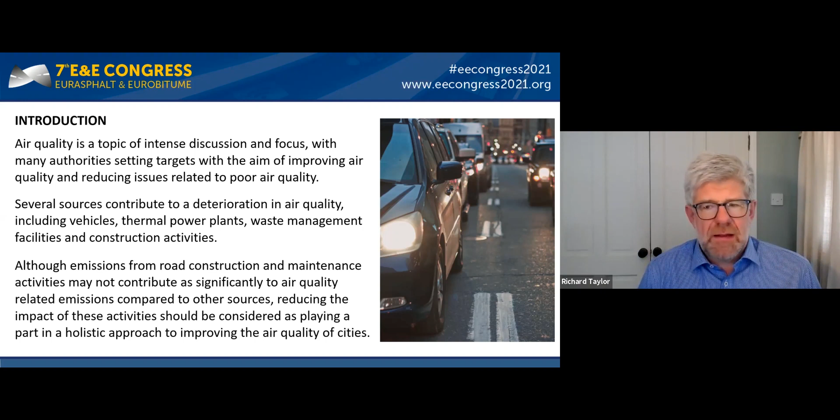I'm going to describe today an additive technology known as Bitumen FreshAir that we developed at Shell over the last 2 or 3 years. The technology is basically added to the bitumen, and it reduces the air quality related emissions from bitumen during storage, paving and asphalt manufacture. If we look at where the sources of emissions related to air quality could be, we may get some emissions at the bitumen refinery or at the PMB plant. Similarly, at the asphalt plant during the storage stage of the bitumen. We also have emissions during the mixing and loading of the material into the truck, and then finally, we will have emissions potential at the asphalt laying sites.

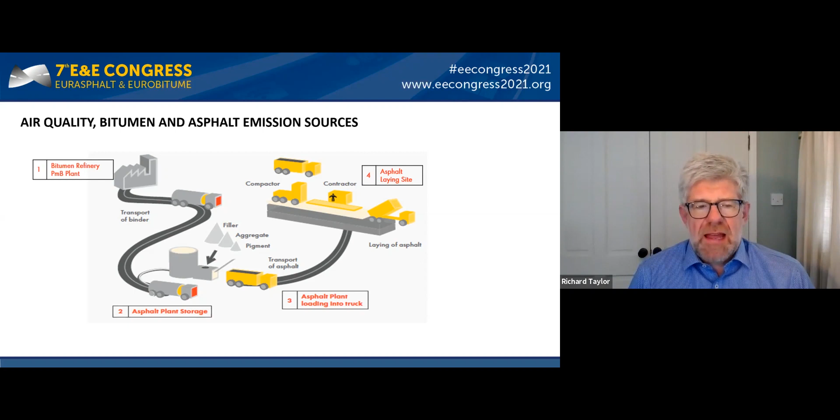Generally speaking, the emissions are more prevalent during the asphalt stage because you have more air within the open structure of the mixture. So if you imagine the mixture in transport, there's more air within that loose mixture for the emissions to develop. Then when you come to the paver, the material is leaving the truck and it's being agitated through the paver, and at the augers there are emissions released. Finally, under compaction, the roller is squashing out the air from the mixture. So generally speaking, we tend to see emissions more easily at the asphalt paving end.

So we started our study at our research laboratory in Bangalore with a set of 20 bitumens from all over the world, from different geographical regions. We took a very wide range of penetration, from 10/20 penetration at one end right through to 160/220. Plus we included 14 additional polymer modified bitumen samples. These were both laboratory prepared and plant prepared, and also cross-linked and non-cross-linked. So what we have here is a very wide range of different bitumen types, different viscosities, different bitumen chemistries, of course from different refineries.

And we designed our lab experiments to simulate the end-to-end story. So we had some tests focused on the headspace in bitumen storage, some during the transportation of bitumen stage, the asphalt mixing stage. We had asphalt mixers instrumented to measure the emissions during mixing, similar with a roller compactor, and then also with slabs of material during their early pavement life.

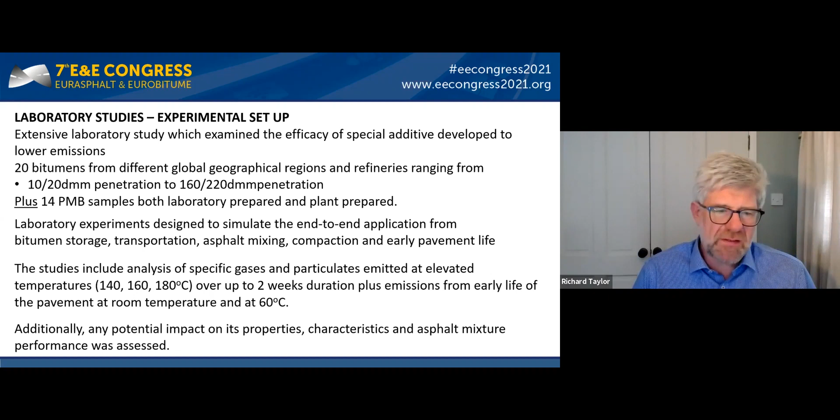So we looked at the range of temperatures for the hot part of the cycle - 140, 160, 180 - for the storage, transportation, mixing, compaction. Then we looked at 60 degrees, which we thought was representative of a pavement on a hot summer's day, for the emissions from the finished pavement. And then, of course, we looked at whether this had any impact on the specification properties and characteristics of the bitumen and the asphalt.

I'm not going to dwell on the experimental setup here - this is all detailed in the paper - but you can see the specific gases and particulates that we were looking at, and you'll spot that maybe not all of them are specifically air quality related. We also looked at H2S as a kind of nuisance gas that we wanted to detect during the exercise. So you can find all the details in the proceedings.

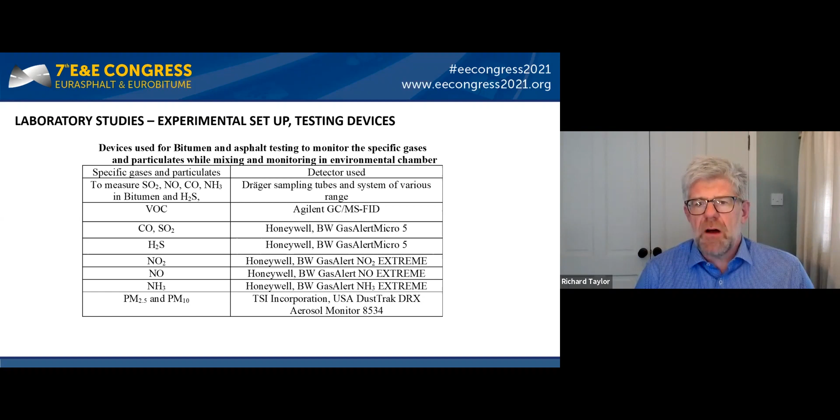So what did we find? If I look at a subset here from the thousands of tests we had - the 20 penetration grade bitumens across the range of temperatures, and the same with the PMBs - we found pretty large reductions in the gaseous species. If we look at the penetration grade reductions for SO2 and NO, we're seeing more than 50% for NO and SO2 at 90, and then in the PMBs we're seeing similar reductions, a mean reduction of 40% SO2.

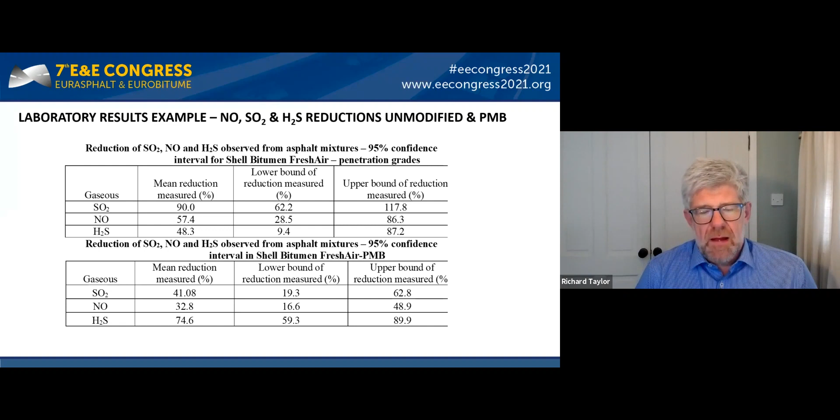H2S, rather unsurprisingly, in a PMB there's simply a little bit more of it there, but it does show that the additive itself is also picking up some of the H2S from the PMB, certainly more than in the pen grade.

Having satisfied ourselves in the lab with a relatively large study, we took this out to the field. Now in the field it's a little bit more tricky, as I'll explain later. We have more co-exposure risk - vehicle movements, wind speed to contend with, other sources of dust. In one of the trials we were close to an airport, so we had other issues there with things that were simply floating in the air.

But nevertheless, we've now done several fully instrumented field trials - I'm going to share the data in a later slide. We followed recognized methodology, and we called in an external agency, an external consultant, who were able to provide us not just with the expertise for the experimental setup in the field, but also the equipment which was certified and calibrated, which we used in all of the trials around the world.

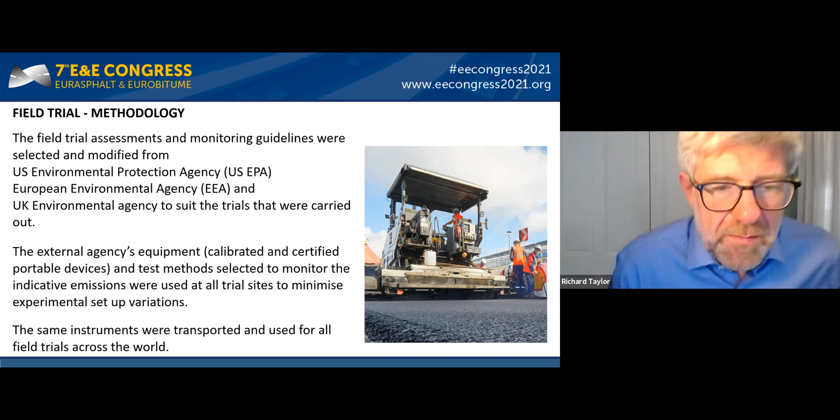So when we were trying to validate the findings from the laboratory in the field, we thought it was very important to take out as many variables as we could. One of the key variables was simply the equipment and instrumentation we were using to make the measurements. And so from the field, a very encouraging set of data from the real life emissions - as you can see, we had similarly fairly high levels of reduction from certain species.

So if we take a look at the NO and NO2, mainly in that sort of 50 to 75% reduction there.

We had some very high reductions in SO2 in some sites. You'll also see there are one or two areas where we had some co-exposure, or we believe we had co-exposure. We had some below detectable limits. We had some anomalous data I referred to there from the field trial, which was close to an airport.

But in general, if we look at this data as a data set, it's pretty clear that the additive is having a positive impact on the gas and particulate emissions coming from the bitumen during the production of asphalt paving and the bitumen storage.

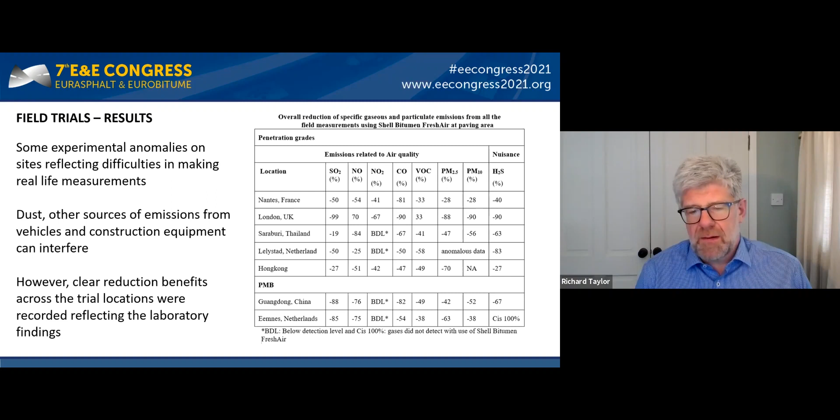And so if we look at the conclusion from the field trials, yes, there were issues with the measurements at times, which is to be expected. But in general, we feel that the outcome of the field trials was pretty well correlated with what we saw in the laboratory.

We would also observe during the field trials that the emissions very quickly disperse into the atmosphere. So if we tried to make measurements, we try to make them very, very quickly when the material is fresh, when it's just being delivered to the paver. If you hang around and try to make measurements later, maybe from a stationary device, you're not going to pick up a lot of emissions.

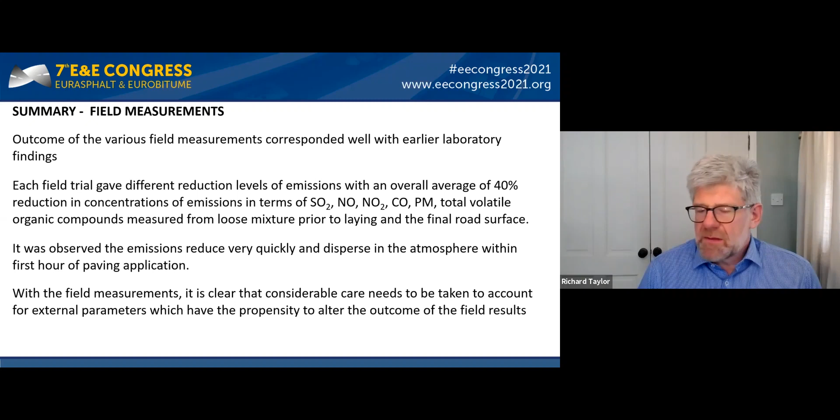And of course, I've said it already, but you really have to take considerable care with the external parameters, upwind measurements, downwind measurements, etc.

So in conclusion, both the laboratory experiments and the field measurements show that the Shell Bitumen FreshAir additive results in significant reductions in air quality related gases, as well as other nuisance vapors such as H2S and odor causing compounds. We have similar efficacy levels across a wide range of bitumen grades.

We don't change the specification here. This is an additive which doesn't change the properties of the bitumen or the asphalt. And since we've developed the additive, we've now gone on to commercialize the technology and launched in more than 10 countries. So I thank you for your attention. I look forward to any questions you might have.

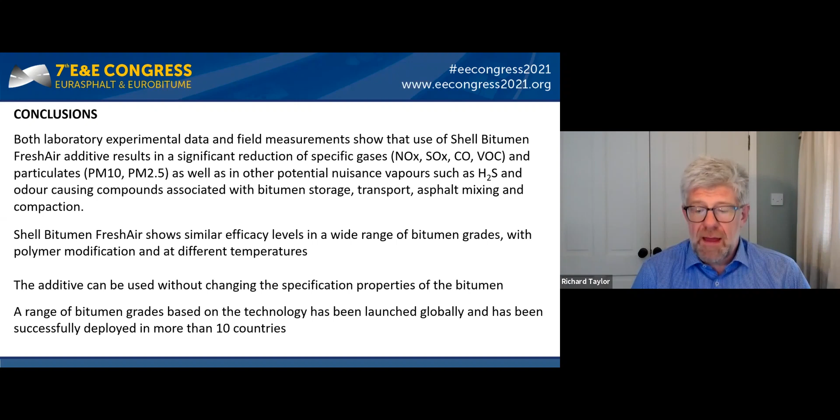Moving on to the next topic. I know when this paper was written, it was quite new for many of us, and it might be still new for you. As you know, EPD is an acronym for Environmental Product Declaration. Larissa Strömberg will present the paper about the experience with Environmental Product Declarations, EPDs, and the digital solutions for the automation of EPDs in Sweden and Norway.

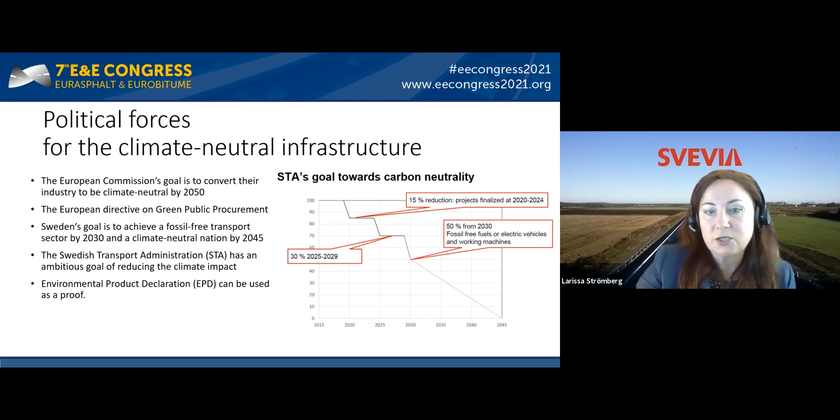The goal is divided into different stages. The first stage was until 2020, when the climate impact had to be decreased by 15% compared with the level of 2015, which is the reference year. Thereafter, the milestones are 30% reduction by 2025, 50% reduction by 2030, 70% reduction by 2040, and by 2045, construction of the engineering works should be climate neutral.

An industry joint project was conducted in collaboration between several road contractors in Sweden, such as PEAB, NCC, and Skanska, the bitumen refinery company Nynas, and the Swedish Transport Administration. The problem statement was: existing standards for developing an EPD leave some freedom, and the comparison between different EPDs, as well as between different asphalt manufacturers, becomes unreliable if different actors use different conditions for the calculations required.

The number of product-specific EPDs for asphalt concrete is still limited, both in Sweden and Norway. The development of a product-specific EPD is a comprehensive, time-consuming and costly task where external expertise is needed. Digitalization of EPD development is seen as a way forward. Our goal was to achieve a common definition of how to measure and report with EPDs, to evaluate the experience from Norway for a digital solution for development of EPDs, and to map actions needed for digitalization in Sweden. We used different methods such as workshops, interviews, and literature review.

As you can see on the left, the development of an EPD is based on a set of standards and regulations, from basic standards on environmental management systems, ISO 14001, and the standard series for life cycle analysis, ISO 14040 to 44, to more specific EPD standards, ISO 14025 and European standard EN 15804, and product-specific calculation rules, PCR. A PCR is produced by an expert group and must be approved by an EPD operator. In addition, the general program instruction, GPI, must be followed when an EPD is being developed. ISO 14025 regulates the program operator, the organization that ensures the verification and publication of EPDs in accordance with the PCR that applies to the product in question.

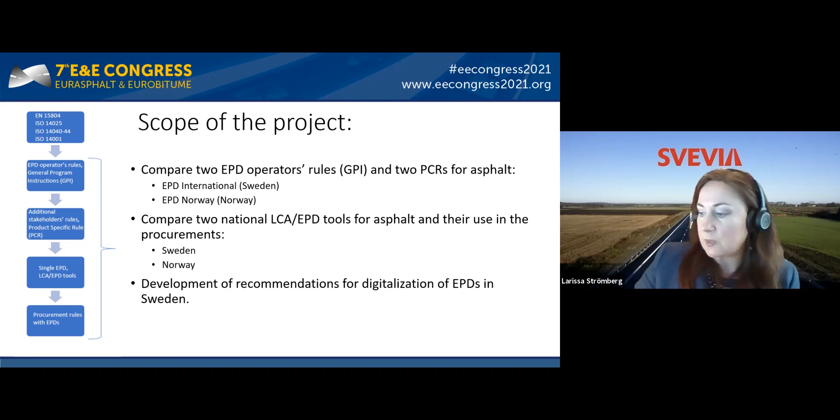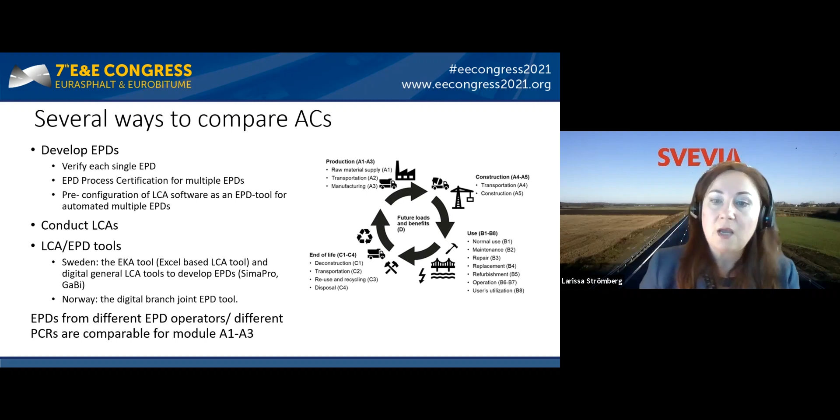This project has identified several ways to compare the environmental performance. Developing EPDs can be done in several ways: verify each single EPD, EPD process certification for multiple EPDs, or pre-configuration of LCA software as an EPD tool for automated multiple EPDs. It can be done by conducting LCAs or using a general LCA EPD tool. In Sweden, we use the EKA tool, and in Norway, they use the digital EPD generator. According to project interviews with EPD operators in Sweden and Norway, EPDs from different EPD operators, according to different PCRs, are comparable only for modules A1 to A3, which is the minimum requirement. The other life cycle stages are not assessed and thus cannot be compared at the moment.

The project suggests several ways forward to use the EPDs. It is easy to adapt the Norwegian EPD tool to Swedish conditions for A1 to A3, but it must be harmonized with both PCRs for asphalt concrete and verified by both EPD operators. Variation in the Swedish client procurement requirements with EPDs is a problem and shall be diminished. In Norway, harmonization of procurements with EPDs has been done. The climate problem is global, but the ongoing effort to develop and implement policies for using EPDs is local and at the project-specific level. The European pavement industry has no harmonized requirements regarding calculation, and this should be done at a higher level than Sweden or Norway, on the European level.

The project recommendations are the following. EPD standards are in place but are not fully used by Swedish clients. The significance of the current procurement requirement for the EPD according to EN 15804 can be very broad. In the examples of project requirements that this study has evaluated, the system boundaries of EPDs for asphalt are not clearly formulated. This study has identified a need to create a common terminology for working with EPDs in the Swedish asphalt industry, in the Swedish Transport Administration's procurement requirements, and the EKA tool. The EPD system is designed to estimate the environmental impact of a product. The system is not yet adapted to be used at road project level. The EPD for the asphalt product can be securely calculated by the asphalt manufacturer.

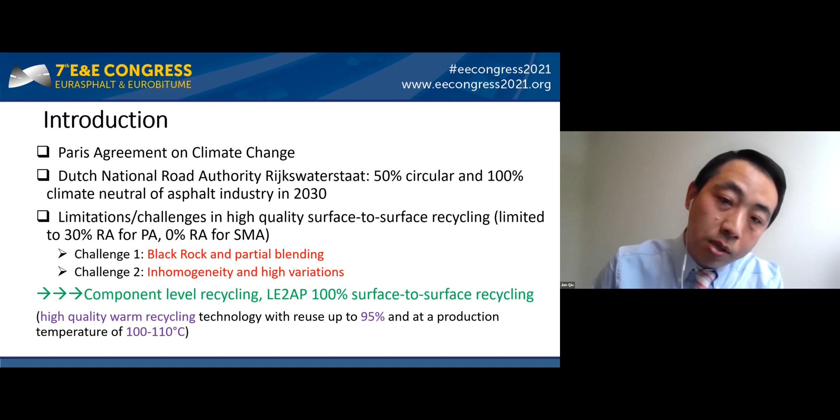To tackle these two problems, we came up with our new solution. We call it component level recycling, that is LE2AP recycling. The idea of LE2AP came from 2013 to 2016 under the European LIFE+ project. What is component level recycling? You may think of the asphalt pavement as aggregate surrounded with a mortar as glue, a mortar composed of sand, fillers and bitumen together. With a decomposition technique, you are able to separate those two, so you get your stones back and also your sand back.

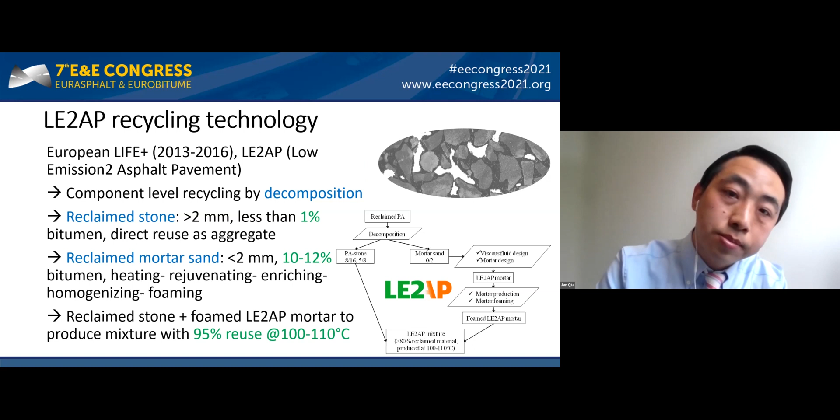The aggregate you get has a very limited bitumen content, so you can use it directly as aggregate. The mortar sand contains about 10 to 12% of bitumen. You can treat it and get a new mortar sand. Afterwards, you are able to foam the mortar and make a high percentage mix at low temperature. A little bit about the decomposition process: it is like a very big centrifuge machine. It runs 50 to 150 tons per hour. What you do is throw the RAP onto the high-speed wall. With the speed, it breaks apart, and afterwards you can sieve it into different fractions. At this moment, we have already applied 200,000 tons in different mixtures, with good experience.

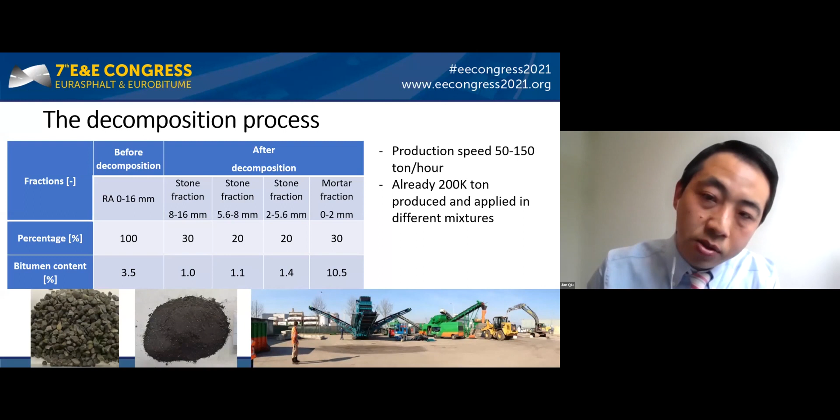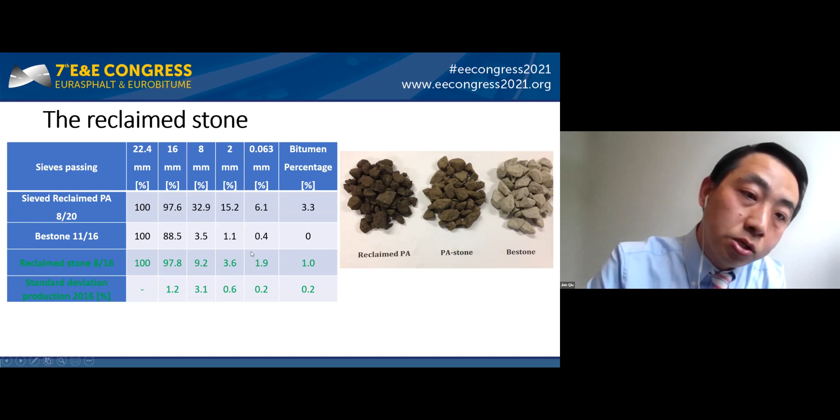The aggregate we have been using, both in gradation and quality, is very much comparable to virgin stones, with a very limited standard deviation. And compared with normal RAP or sieved RAP, it contains less sand, less bitumen and less filler. So the variation is very limited, which allows you to use it at high percentages.

The mortar you get, the orange one, has almost similar gradations of sand and fillers compared with the virgin mortar, but it has a low bitumen content and a lower penetration. So we have developed a blending rule to enrich and rejuvenate it by adding softer bitumen and rejuvenator. Afterwards, the mortar can be tested at laboratory scale with the DSR. So we are able to make a high quality mortar compared with the virgin.

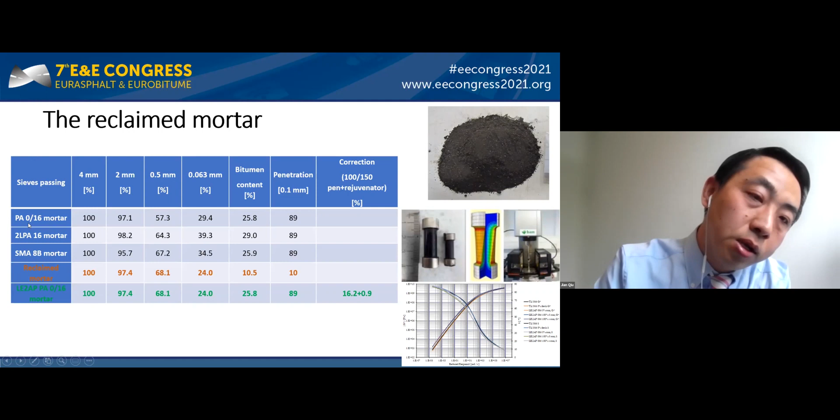The mortar production, that is the second scale. When you want to make it high quality and also in a high amount, in the laboratory you need what we say is a production unit. This is the kettle with the mixing device. That is where you can produce your mortar, and above that you will see a dosing unit. This is a new format of that. With the dosing unit, you are able to foam it at low temperature.

In this case, the mortar that you foamed is at a temperature of about 110 to 120 degrees. And here you will see the expansion ratio of this foamed mortar. It's on average about 10, with a half-life of 3 to 4 minutes. It is very long, and it is very good quality without settlement.

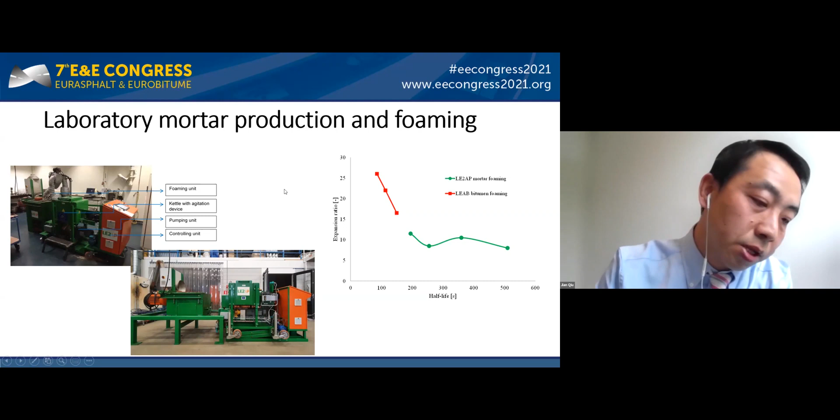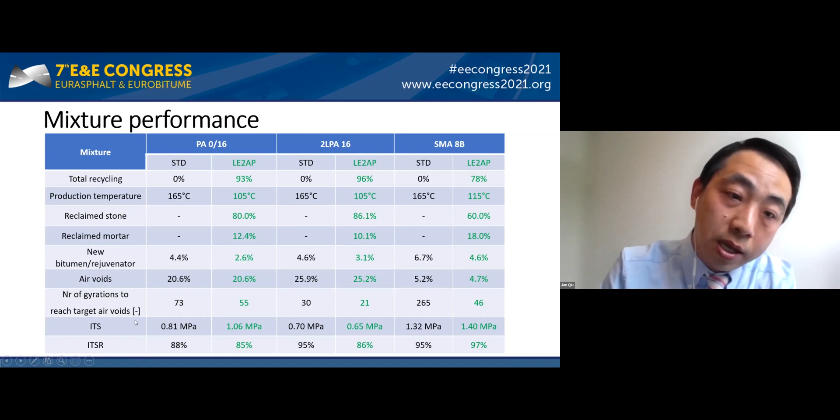When you have the mortar produced, then you can produce the mixture, and you will see that with the 3 types of mixtures with the LE2AP category, there is a very high percentage of recycling and low production temperature. In the end, you will see that their strength and water sensitivity values have very good results. Yeah. Now we go a step further.

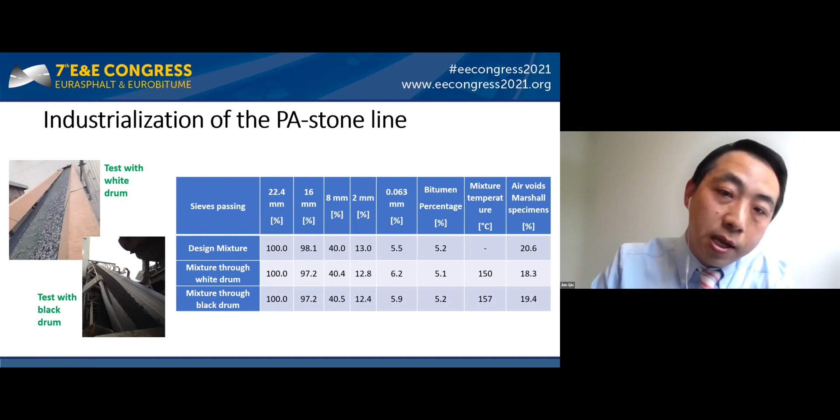We go for industrialization. The handling of the recycled aggregates is not that difficult. You can do it with the white drum, or you can do it with the black drum. We have been conducting research on that. It does not make much difference afterwards. Yeah, the mortar line is a different story.

There is no standard mortar dosing or mortar production unit. The only thing is you can borrow it from mastic asphalt. We did it first with the mastic asphalt concept. We use the stirring kettle from the mastic asphalt, and we dose the mortar in, and also the softer bitumen. And afterwards we use a dumper to lift it to the side of the plant, and by making a dosing pipe out of it, we're now able to dose the mortar into the mixer.

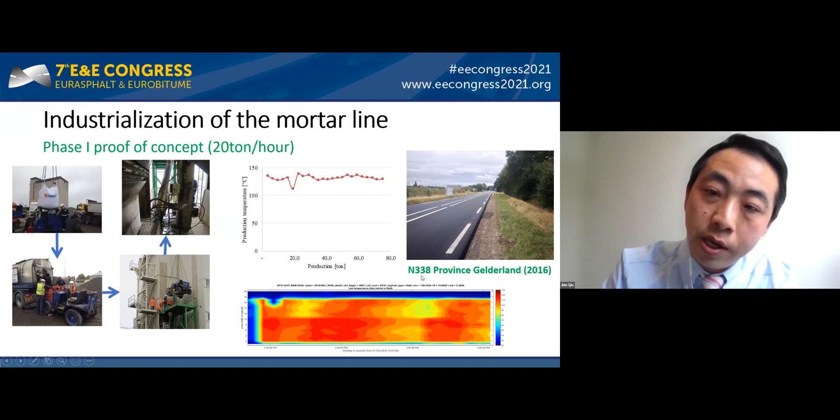Of course, this is very labor intensive, so we could only achieve, for the proof of concept, 20 tons per hour. We were able to make a stretch in the province of Gelderland on the N338 in 2016. The second step is to make it optimized.

In 2018, the province of Gelderland and also the province of Brabant came to us to say maybe it's time to go further and apply it for SMAs. SMA has a specific challenge. It has 2 times more mortar than porous asphalt, and also a longer stretch. So we said we don't use the dumper anymore. We are using a big kettle.

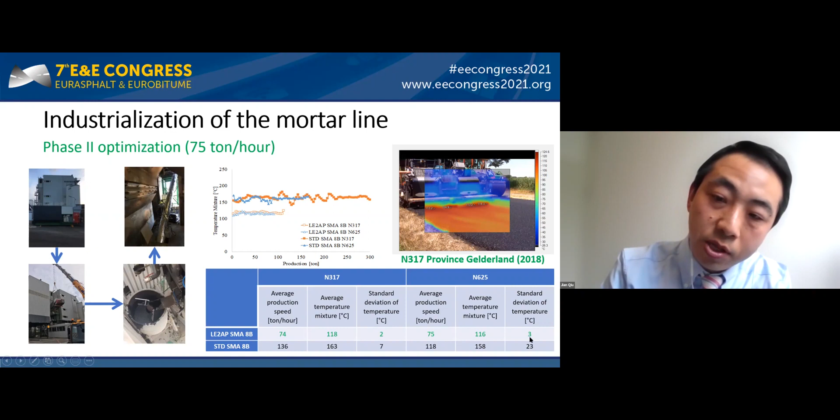This kettle allows you to have 50 tons of mortar inside, and now we lift the whole kettle, and we also built a dosing unit into it to be able to have correct dosing. Afterwards, we are able to produce. What's interesting to see in the results is that the standard deviation of this type of mixture is very limited compared with the standard one.

The further step that we are now working on is to go for full industrialization. We want normal production to be adapted to 100 to 150 tons per hour continuous production. Translated to the mortar part, that is about 20 to 30 tons per hour continuous production. And we are now working on this.

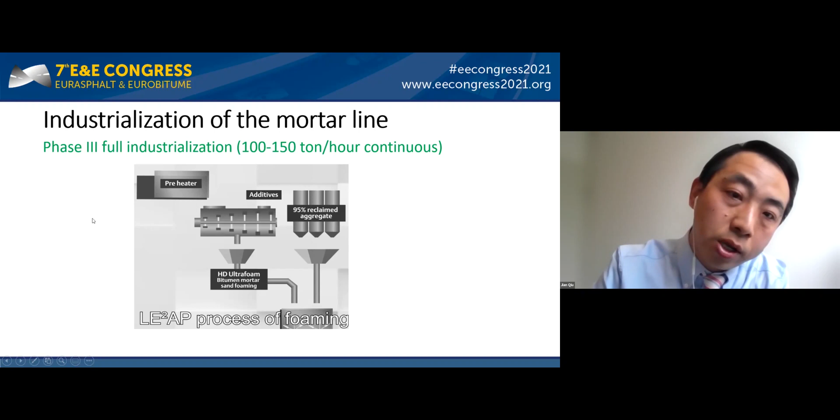So to conclude, it is possible to make high quality surfaces with a very high percentage of recycling, reaching 96%, with a low production temperature of about 105 to 115 degrees, and it will benefit your environmental cost by 50%. We are busy developing the mortar line, and the mortar line can be used and is already being used for different types of mixtures, and is performing well. And now we are looking for a way to make it a continuous production.

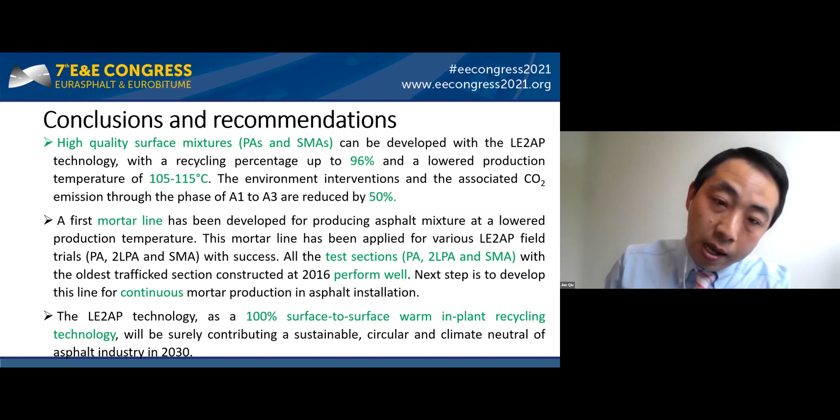In the end, we say that LE2AP is a method that has good potential for 100% surface to surface warm recycling, contributing to a sustainable, circular, and climate neutral asphalt industry.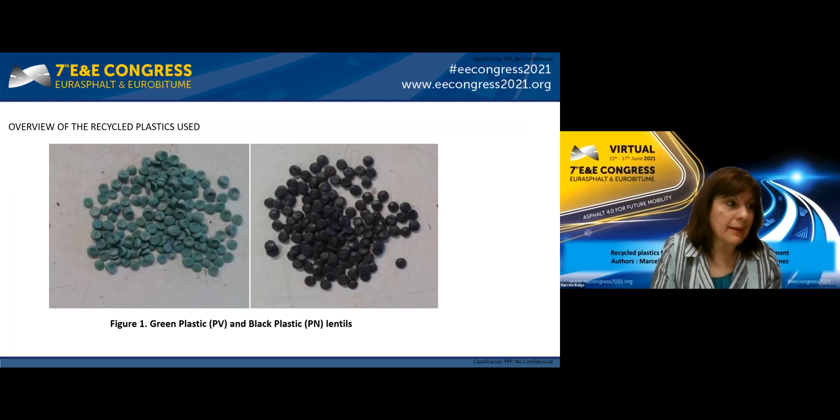In a previous lab study conducted before the field test, a softer CA20 bitumen was used to incorporate the recycled plastic both in pellets and in powder, in 4 increasing amounts from 1 to 4%. The samples were compared with 2 other bitumen control samples, which were a conventional CA30 bitumen and a commercially available polymer modified bitumen named AM3. This bitumen met the respective Argentinian specification. The physical and rheological characteristics of these 3 bitumens are shown in this slide.

The previous test showed a level of 4% of PE when added to the CA30 bitumen did not always result in homogeneous distribution of the PE material. It was also found that adequate mixing temperature, speed, and time are key variables in the mixing step to get a homogeneous final product. It was concluded then that the CA20 bitumen was the best option to incorporate the recycled plastic in order to get a compatible plastic bitumen mix.

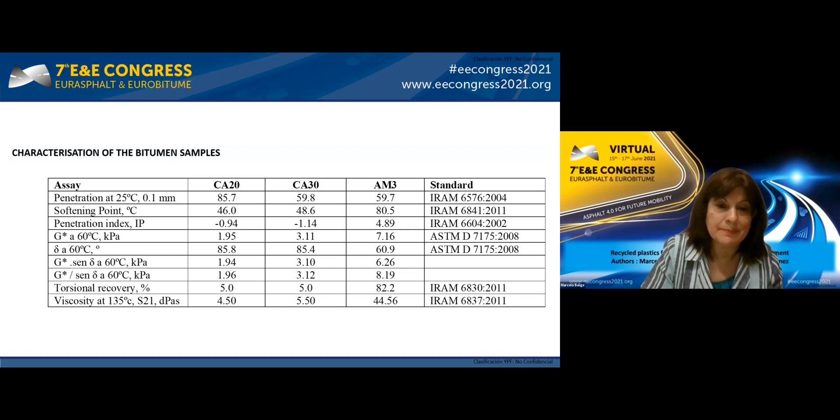Going to the field work, between late 2018 and January 2019, 5 different types of experimental pavement sections were constructed on provincial route number 18 of the Argentine province of Santa Fe, from kilometer 11 to kilometer 11.5. The scheme of the lanes going to and coming out of Rosario City is shown at the bottom right portion of this slide.

There, you might see that 4 of the 5 pavement sections shown in the upper part of this scheme, of 100 meters each, were built using modified bitumen with either recycled green plastic coded PV or black plastic coded PN. The process used to incorporate the mentioned recycled plastic is identified in the graph either as VS when the dry process was used or VH when the wet process was used.

You will also see that the 5th asphaltic section of the descending lane at the extreme right of this graph used a conventional CA30 bitumen. This section was selected as the reference pavement of this experimental work. Finally, at the bottom part of the graph, you will find the ascending lanes going out of Rosario were built using recycled black plastic incorporated with the wet process, coded as CA20-PNVH.

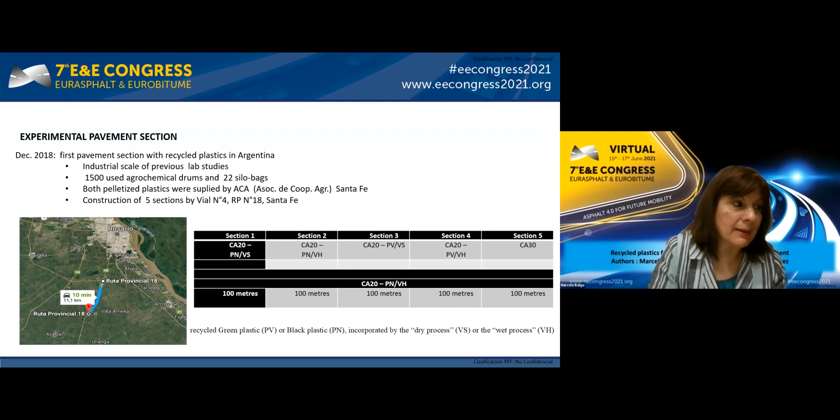In summary, this was the first asphalt pavement construction in Argentina which used recycled plastic from drums and silo bags. The following conclusions were obtained. Firstly, the lab results of the asphalt obtained from the experimental paved sections were in good agreement with the product previously made and analyzed in the lab. However, the voids measured in samples extracted from the experimental sections showed a higher value when compared to the lab mix one.

Secondly, an improved resistance to moisture damage was detected in all asphalt that incorporated recycled plastic, as measured by the tensile strength ratio, when compared to the CA30 asphalt adopted as reference. All paved sections complied with the permanent deformation specified by the Argentinian road authorities.

Fourthly, while cracking problems had been observed a year ago in the US in pavement that included modified bitumen with recycled PE wax, our periodic assessment of our experimental sections, which includes macrotexture analysis by the sand patch method, rut depth assessment, as well as sample extraction, so far has given positive results, especially on the CA20-PNVH asphalt mix used in section 2.

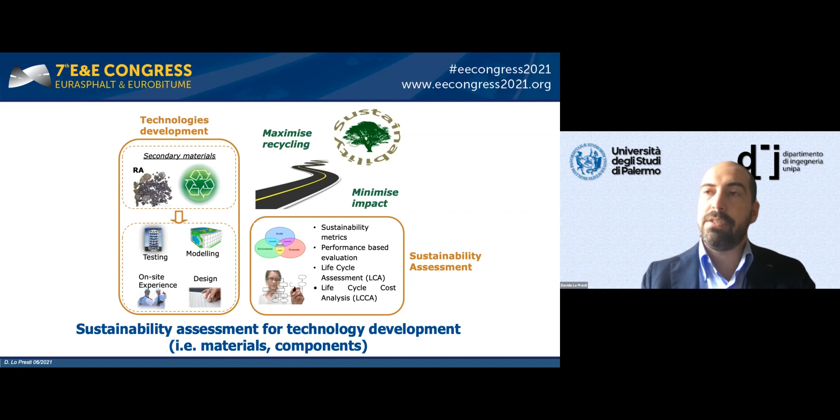But this will also need to happen whenever we manage an asset like the road, and whenever we want to understand whether one maintenance and rehabilitation strategy is more sustainable than another. In other words, we would like to include a sustainability performance-based management of road pavement, which is what we call life cycle management.

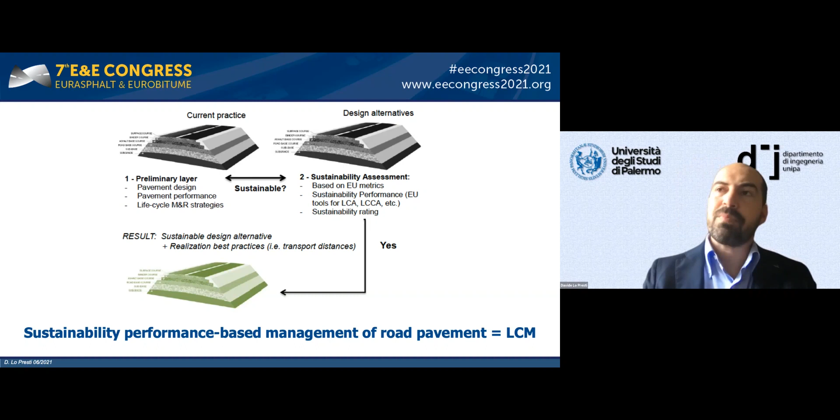Hence, Pavement LCM is a project that has been supported since 2019 by the Conference of European Road Directors to exactly provide this type of knowledge and tools to CEDR.

The goals of the project are, one, introducing guidelines on how to perform lifecycle management with a specific focus on sustainability assessment, but also to create a platform for the interactive transfer of knowledge. So we learn by doing and sharing, and finally to produce a package of frameworks, data sets, and tools to allow road authorities to implement this concept within their organization.

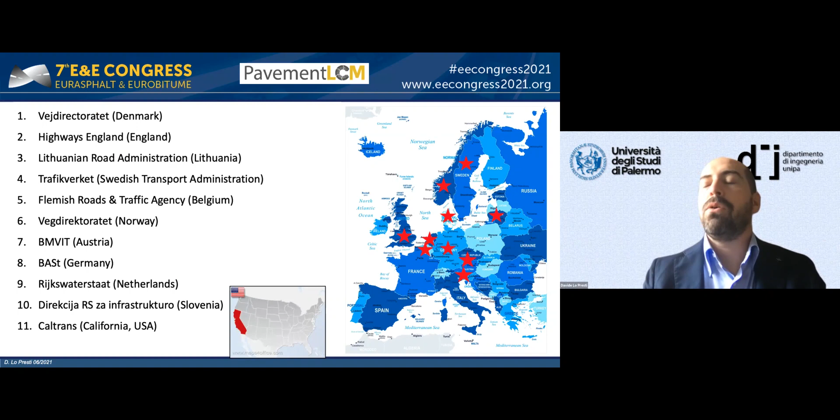So let's see, first of all, what do they know, at least up to 2019, when we had the chance to collect interviews. To understand that, we performed interviews by sharing a questionnaire amongst different road authorities in Europe and also in California.

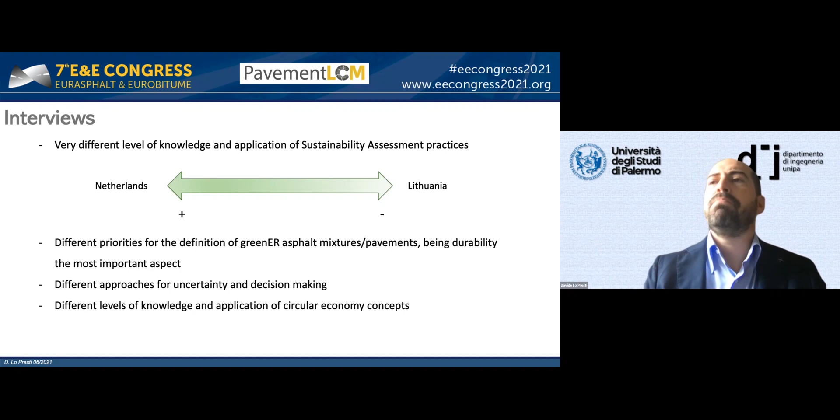And what we found out is that there are clear differences and different levels of application of what we think are important concepts related to sustainability and sustainability assessment—different definitions for a greener asphalt, for instance, or greener pavements. Certainly durability is considered one of the most important aspects, but there are differences in other areas too.

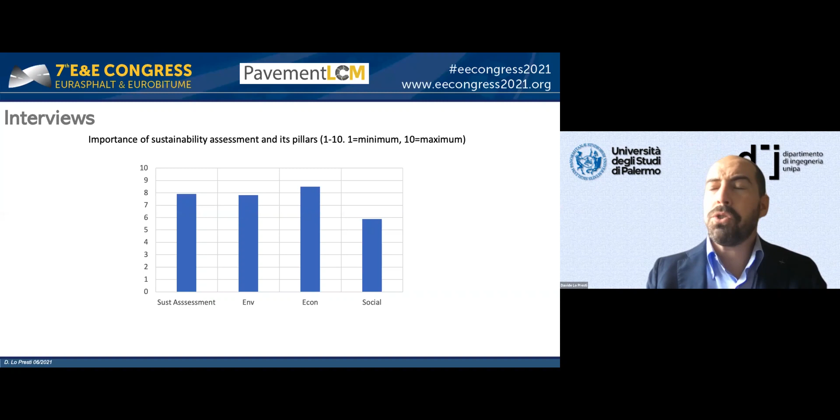In terms of what is intended by sustainability assessment, the majority of people consider environmental and economic as the main pillars. So the social pillar is still blurry for the majority.

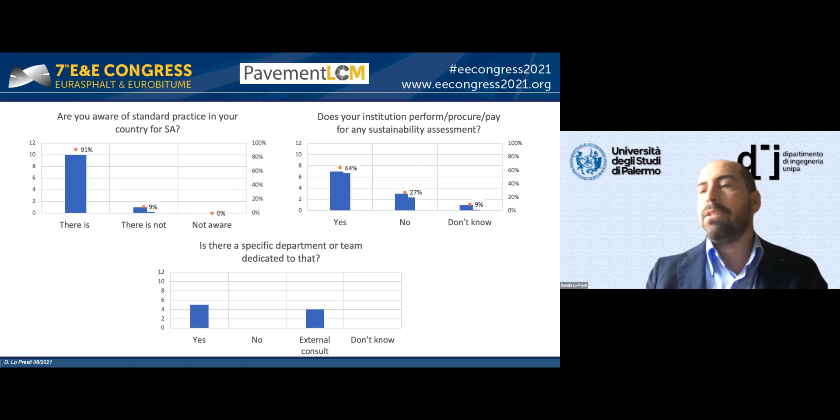Organizations are aware of standard sustainability assessment, and they know that within the organization, someone is performing it or using it to procure projects. There is usually a department dedicated to it or an external consultant who carries out the job. The exercise is made mainly at the planning stage, and there's a balance of reasons for doing it, but mostly it's for decision making.

For road authorities, the exercise is mainly important at the maintenance stage, of course, because they have to manage the asset, and the exercises carried out so far are more focused at the project level.

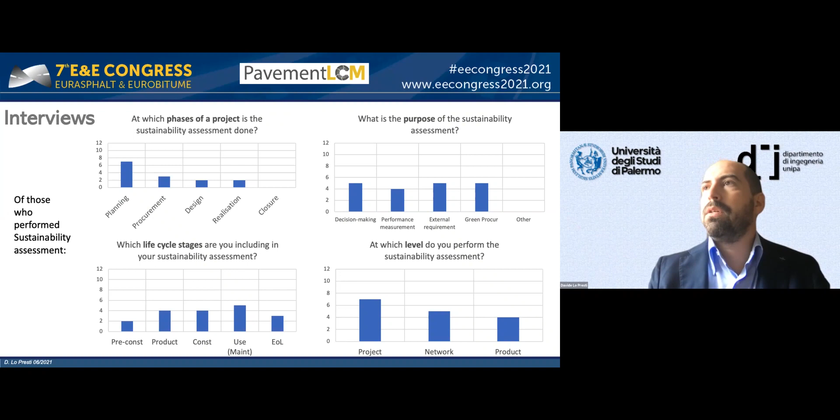So these are some of the results we wanted to share, just to give an idea and to help understand where we should focus to improve what they know.

So for the sake of time, I'm going to move directly on to what national authorities do about it. So what are they doing?

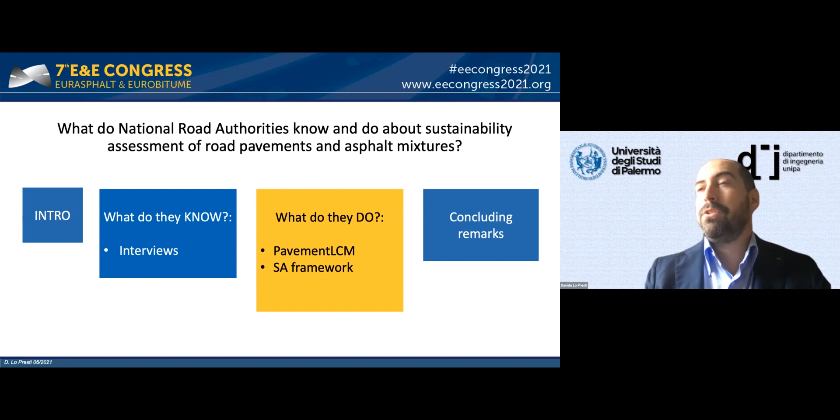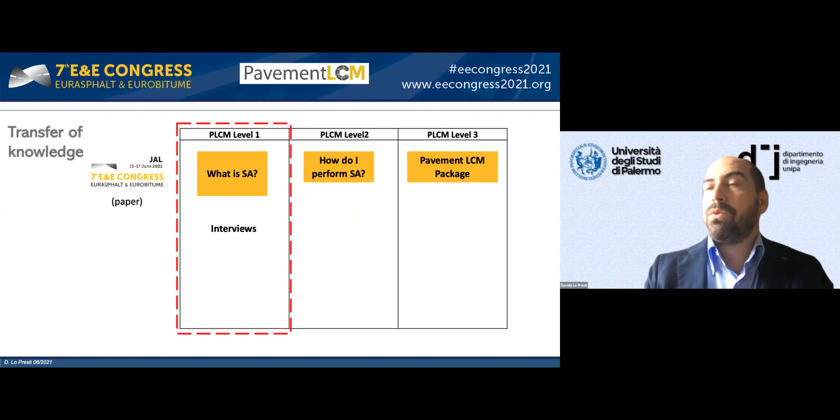First of all, I will say they are supporting Pavement LCM, which is a project supposed to provide them with this type of knowledge. The state of the art was done with the interviews, and the results are in the paper. But we're also organizing webinars—we organized two, one in 2020 and one in 2019.

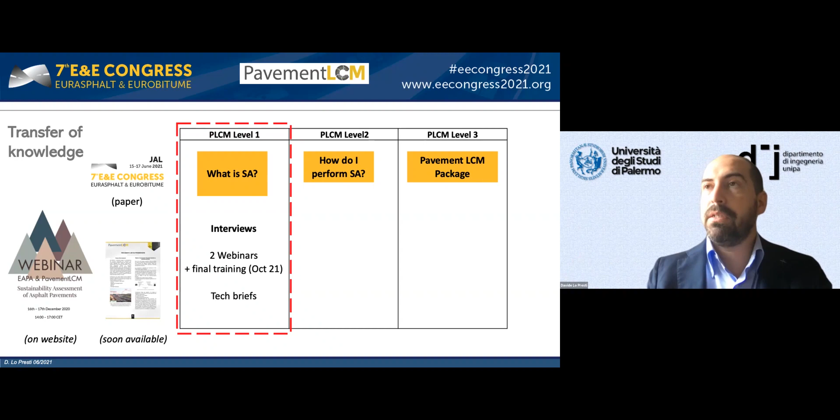And the second one was very successful with the support of EAPA this December. But we're also creating documents like technical briefs that can be distributed among the staffs of National Road Authority. And what else they're doing is that they would like to have a framework to actually understand how to comply with standard procedures. Well, this is exactly what we're doing.

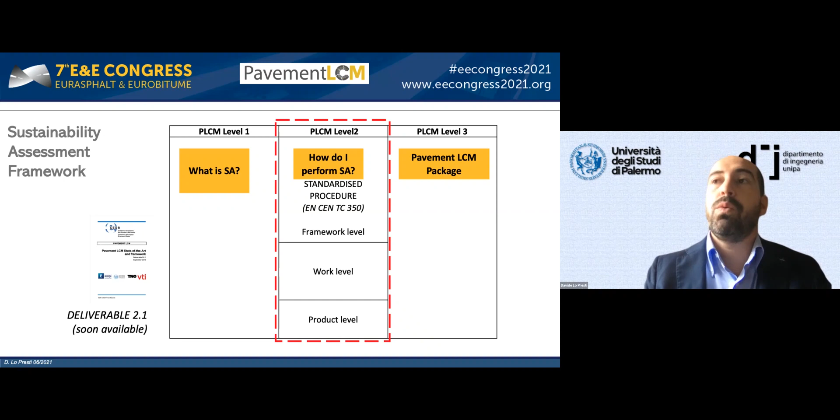And for those who don't know, since 2011, at least at the European level, there is a committee, the CEN Technical Committee 350, which is working on defining a standard for sustainability of construction works for civil engineering works. Within these standards, it is suggested to perform an exercise that considers indicators covering the environmental, social, and economic pillar, but also to identify what is called technical and functionality requirements.

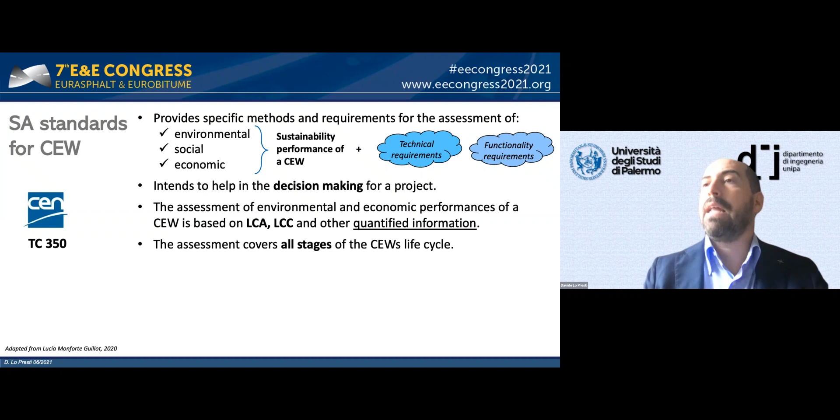The exercise is intended to help for decision-making related to a project, and to do a sustainability assessment with quantitative assessment of the value of the indicator by using life cycle techniques such as LCA and life cycle costing, doing this exercise for all the stages of the work, for products, processes, and services, applicable to new as well as existing civil engineering works, and using environmental product declaration as a communication tool.

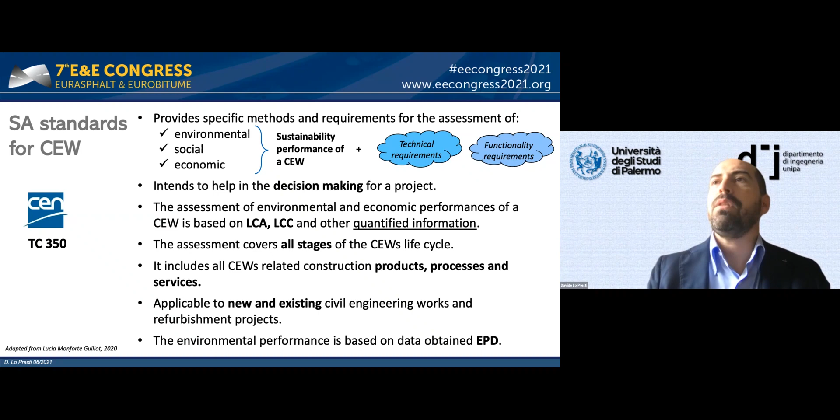So in order to do that, we set up a process which is defined here in the slide. All the stages are covered in the deliverable, but today I really wanted to give you a highlight of two parts which are very important.

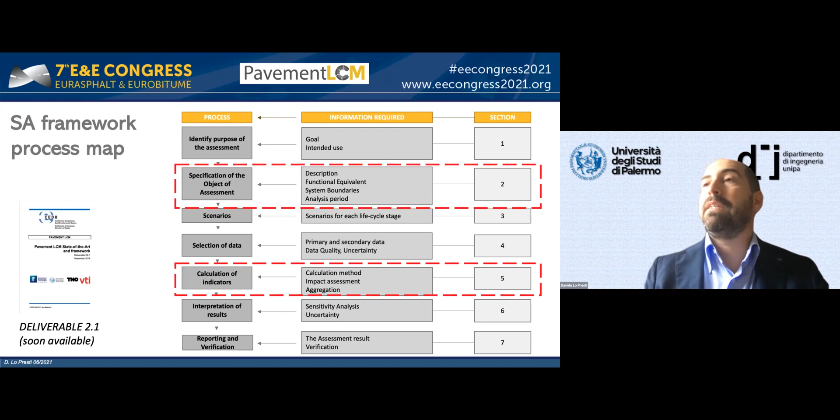First of all, within the object of assessment, it's what we think are the system boundaries of the exercise. We suggested to use the framework now specifically for pavement, and in particular by doing two exercises which are different in nature for us. One is for pavement materials, the other one is for pavement maintenance activities.

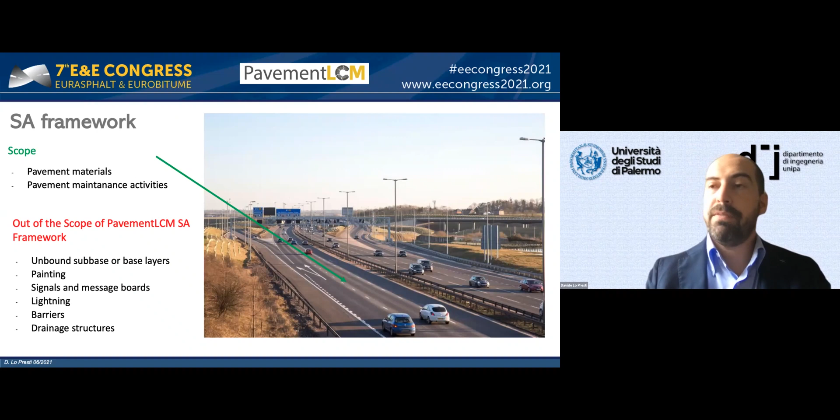Painting, signals, lighting, barriers for the moment can be out of scope, even though the framework is flexible enough to do that. And the two exercises are really, as you see in the slide.

So first of all, we have a cradle to gate exercise where we can include the production of asphalt mixture, for instance. And this is a different exercise because this has experts such as material scientists, material supplier, asphalt manufacturer, contractor, and the indicators are also specific for this phase.

While the other exercise, which can be cradle to laid or cradle to grave, well, this is for evaluating the sustainability of maintenance rehabilitation strategies, for instance. So this is what should be duty of road owners and road managers. So concepts like reference service life are introduced, and functional unit is here per square meter of pavement.

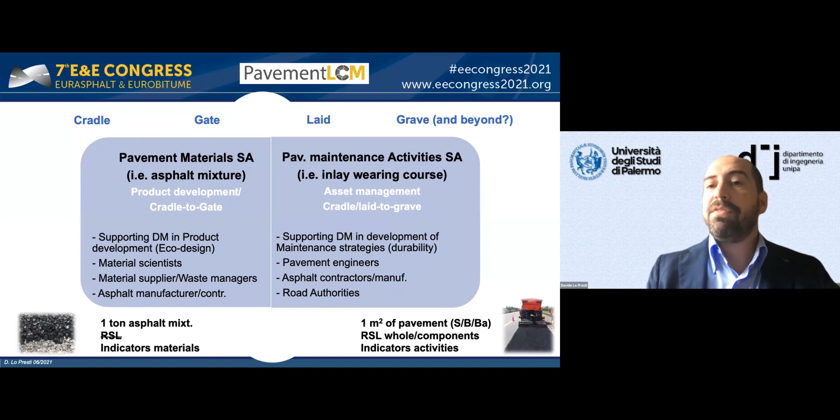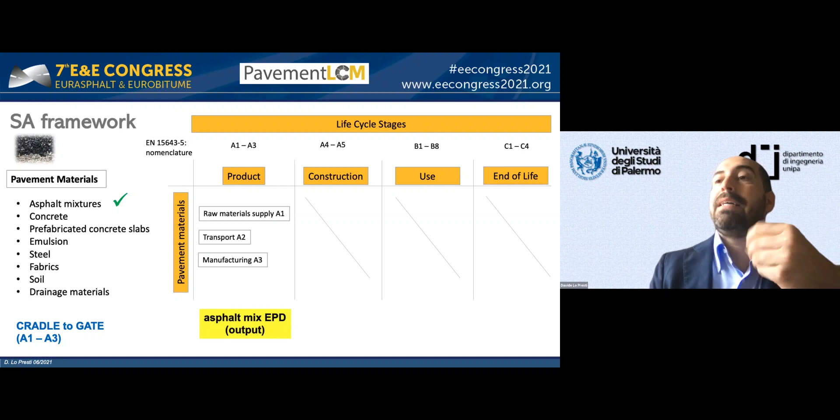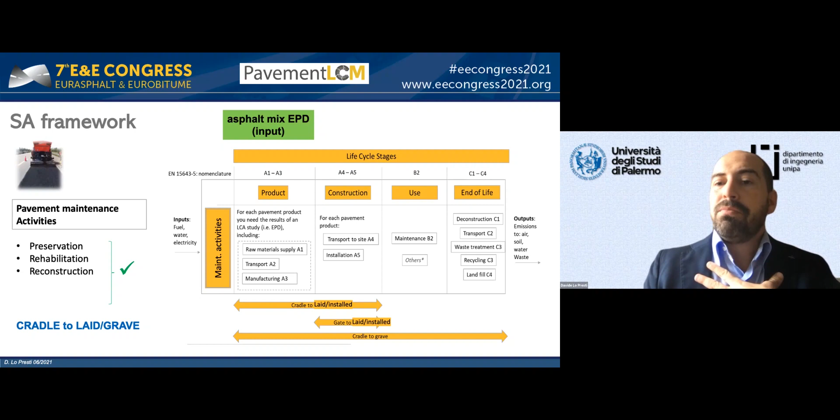So different exercises that are linked by one product, which is the EPDs, that should be developed at the pavement materials or product side as an output, and should be used as an input when we evaluate, for instance, certain maintenance strategies. So this is one of the main messages.

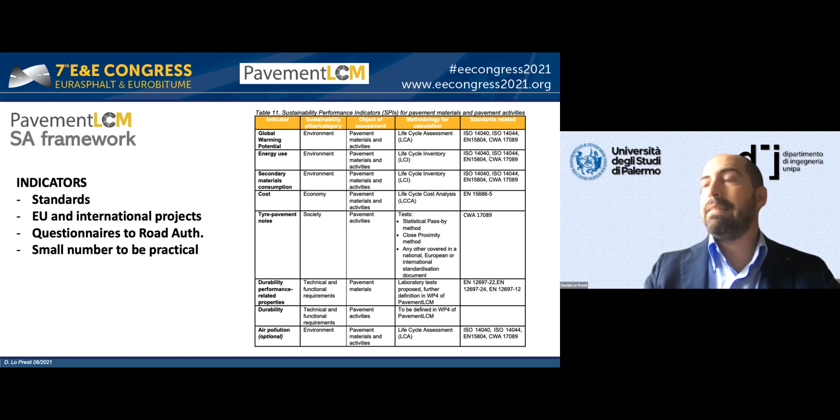And the other one is that we developed a list of indicators that cover the three pillars as well as the technical and functionality requirement. And these are based on a survey we did over standards and different projects, as well as contacting road authorities. These indicators are divided by pavement materials, pavement activities, and can be all quantified mainly with life cycle techniques.

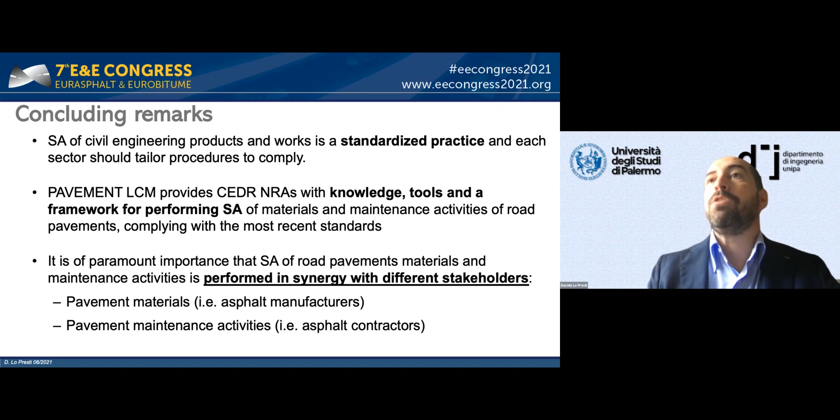So this synergy is very important, and that's why we would like to introduce what we started at the end of 2020, where we did the first workshop on sustainability assessment together with CEDR and EAPA, who organized it together, and we facilitated by providing results of Pavement LCM. We suggested to stay tuned because next there will be another one very soon.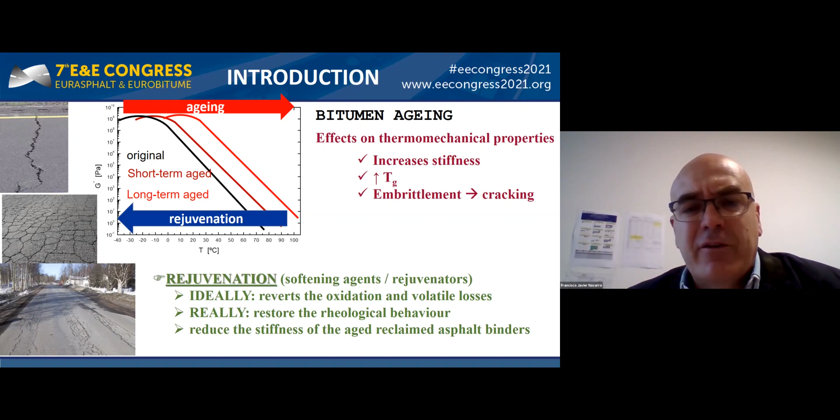In order to alleviate this problem, rejuvenators are usually employed. Even though bitumen rejuvenation ideally should revert the effects of oxidation and volatility losses, in fact what they really do is restore the original rheological properties of the binder, so most of them are softening agents that reduce the stiffness of the aged bitumen.

Here, a new concept of physicochemical rejuvenation is presented that involves the use of amphiphilic surfactants formed by a long aliphatic apolar hydrocarbon tail with a polar reactive head able to chemically interact with polar bitumen compounds. Therefore, it is expected that by attaching reactive molecules to asphaltenes, the surface polarity is reduced and their association into larger structures is inhibited, leading to a disruptive effect.

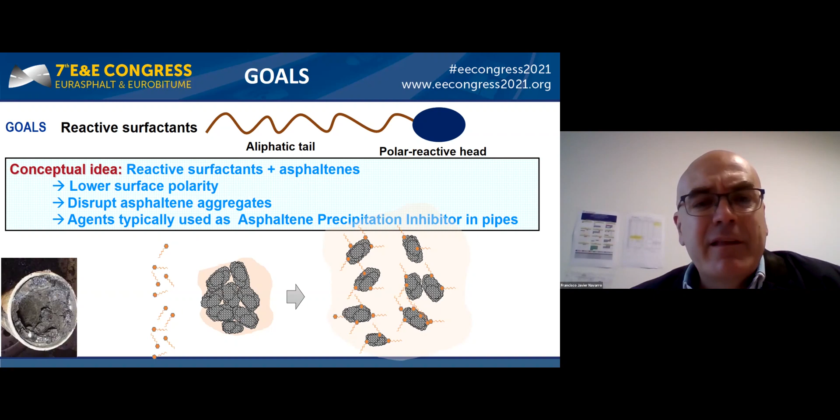Two different sets of surfactants have been used here, both having an aliphatic tail of 12 carbon atoms: dodecenyl succinic anhydride, called DSA, and dodecyl benzene sulfonic acid, DBSA, and its sodium salt, sodium dodecyl benzene sulfonate. In addition, to study the effect of the polar reactive head, succinic anhydride and benzene sulfonic acid have also been used as bitumen modifiers.

Finally, a typical SBS from Dynasol, commonly used to modify bitumen, was used for comparison. A hard 13/22 bitumen was employed as the base material for this study and modified with 3% of each reactive surfactant. After modification, samples were submitted to rheological characterization, infrared spectroscopy, thin layer chromatography, atomic force microscopy, technological tests, etc.

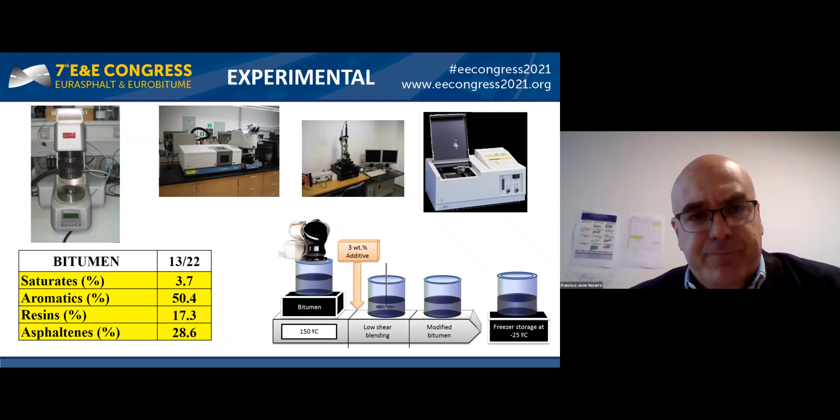The addition of alkyl benzene sulfonic acid, DBSA, leads to a decrease of 3 decimillimeters in penetration and a clear rise of 4 degrees in softening temperature. By contrast, the alkenyl succinic anhydride, DSA, produces an opposite effect, revealed by a subtle penetration increase and a clear drop of 4 degrees in ring and ball softening point. Consequently, DBSA appears to act as a stiffening agent, whereas DSA seems to produce a softening of the binder after modification.

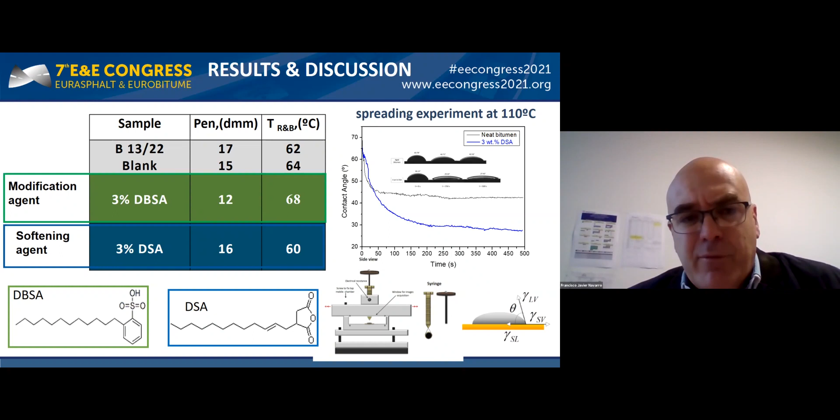The effect of both additives at high in-service temperature may be analyzed by means of flow curves at 60 degrees. Analyzing the unmodified binder, it's clear that the blank sample only undergoes a slight increase in viscosity due to bitumen oxidation during processing. However, DBSA modified bitumen presents a remarkable increase in Newtonian viscosity, reaching values very close to those of SBS modified binder. On the contrary, DSA modified bitumen undergoes a completely different effect, clearly presenting a notable drop in viscosity values.

In order to characterize the thermorheological behavior over a wider temperature range, a temperature sweep in oscillatory shear at 10 radians per second has also been performed on all samples.

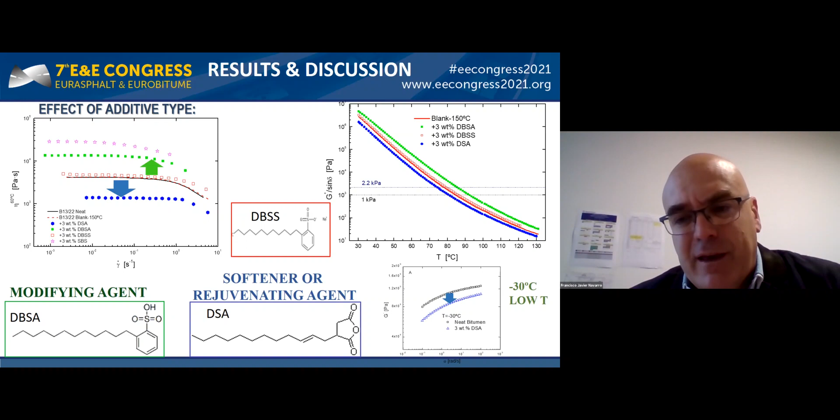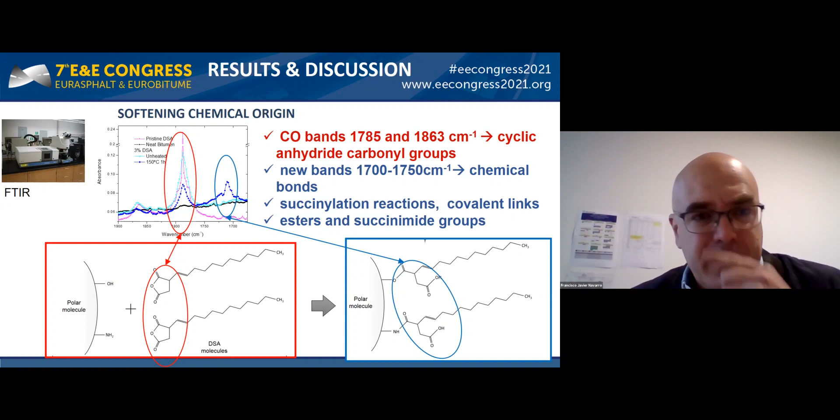In order to analyze the chemical origin of this modification, infrared spectroscopy has been performed on succinic anhydride surfactant samples. As shown in this picture, the typical bands associated to anhydride carbonyl groups are reduced during processing, and additionally, the appearance of new peaks associated to the formation of ester groups are clearly observed. Consequently, as shown in the bottom picture, the DSA molecule results attached to polar bitumen compounds by means of covalent links.

In addition, in the case of the sulfonic acid surfactant, the chemical modification pathway is really different. Thus, it is well known that sulfonic acids are able to protonate the heteroatoms of asphaltenes, leading to the attachment. Consequently, in this case, chemical evidence of what is happening here is the increase in the SARA chemical composition of the asphaltene fraction beyond the 3% of the other surfactant. In addition, when the insoluble fraction in n-heptane is submitted to thermogravimetric analysis, the derivative of weight loss curves clearly shows the appearance of a new peak, which is associated to the development of the ionic pairs between asphaltenes and DBSA.

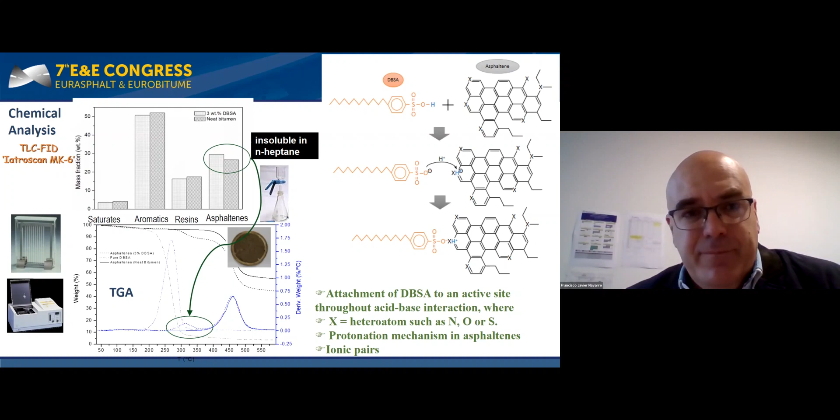However, if we compare the modification caused by the polar head on both additives with those caused by the surfactant, it is clear that the presence of the aliphatic tail leads to a remarkable reduction in the viscosity. Therefore, this result confirms the previous assumption, and the attached non-polar aliphatic chain clearly presents a disruptive effect.